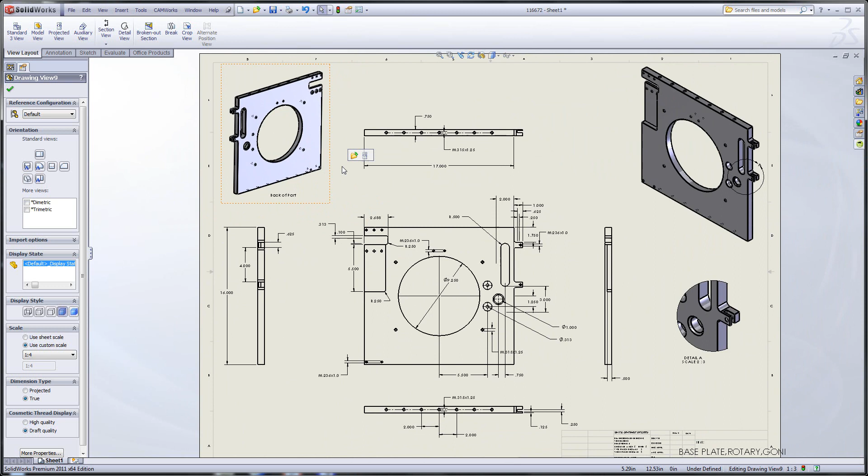We'll take a look at the plate, and Camworks works right inside of SolidWorks. You'll notice the only two differences are that we have two extra little tabs in the feature manager, and we also have a ribbon on the toolbar. Camworks works directly inside of SolidWorks, and it just launches as an add-in, similar to some of the other programs that you may use.

Camworks has been a long-time partner with SolidWorks since 1996, and when you purchase Camworks, you also get Solid Professor. So if I search on Solid Professor for Camworks, you'll see some of the courses for how to use the Camworks mill, the turning, and the EDM portions, and they have more to come. For the most part, Solid Professor is just a video library that's going to help you get started.

Let's go ahead and get back to the part. Camworks has two different tabs: one is the feature tree, and the other is the operation tree. On the feature tree, we can go ahead and set what our stock limits are.

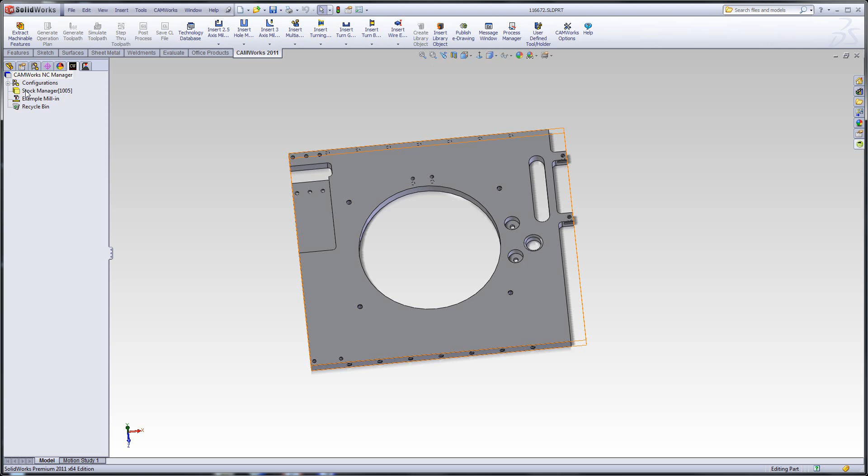If I edit the definition there, you'll notice it uses the envelope or the bounding box of the actual part to define its parameters. We can also use a sketch, or we can import an STL file if we're actually machining from casting.

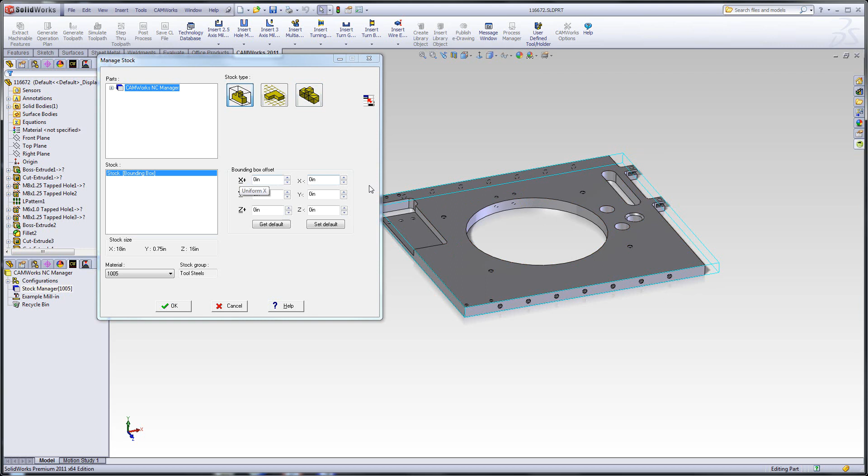Now this plate is already set the correct height, so I do want to go ahead and change some of the external components on the X, and I'm going to go ahead and hit the X so that it does it in both directions. So you can see I've got a little bit of space on both sides, and then I'm also going to do it in the Z. I've got to take a look at my X and Z, it's kind of a little bit flipped from here.

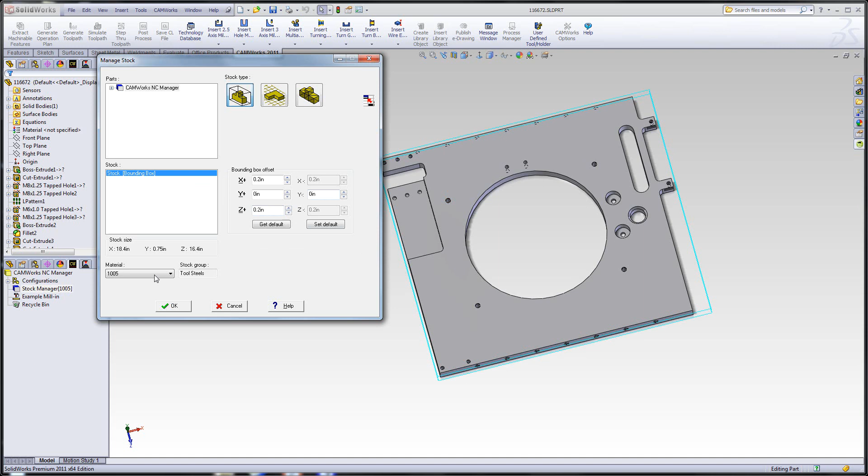So I'll go ahead and add a little bit of extra material. Last thing I need to do is go ahead and set my stock. So this is 6061 T6, and we'll hit OK.

The interface is fairly simple. The next thing I need to do is tell it what type of machine I'm going to use. So I edit the definition on the machine. If I go to the machine tab, you can kind of see I can pick mill turn, or wire EDM machines. In this case, I've already picked a mill inch, which is normally a 3-axis.

We have a tool crib that we can actually tell what different types of tooling we're going to use. And I also need to tell it what type of post we're going to use. In this case, it's just a 3-axis, and it's a Fanuc type post. So go ahead and say OK out of there.

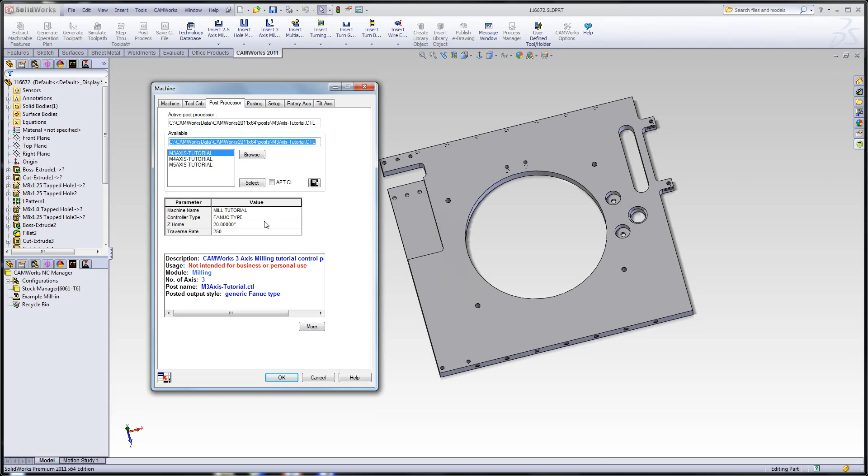And before I actually start creating some of my code, I'm going to take a look at some of the Camworks options.

On the Mill Features tab, I'm going to come down here. I'm going to tell it not to do any facing, and the reason is because I've got my plate stock, and I don't really care for it to do my part perimeter. I also don't have any tapered or filleted tops on here. I do have some chamfers, and we'll take care of those later. So I'll go ahead and say OK.

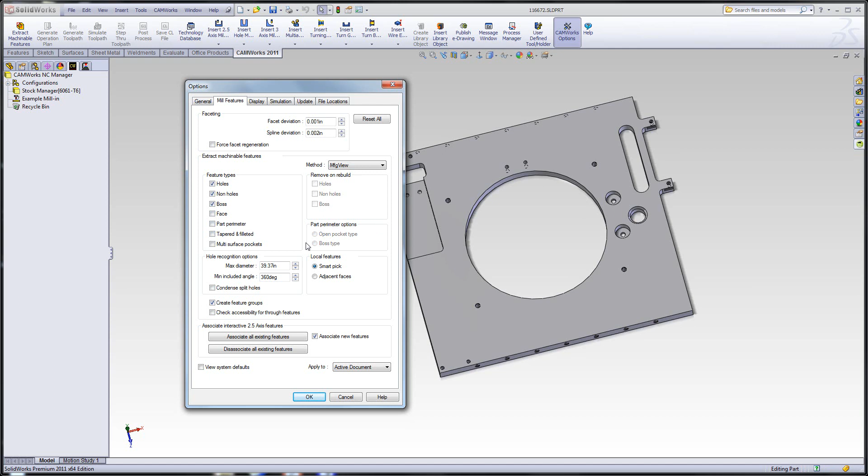And now I'll let Camworks go ahead and do its work. So I'll extract the machinable features. They usually call this Automatic Feature Recognition, or AFR for short.

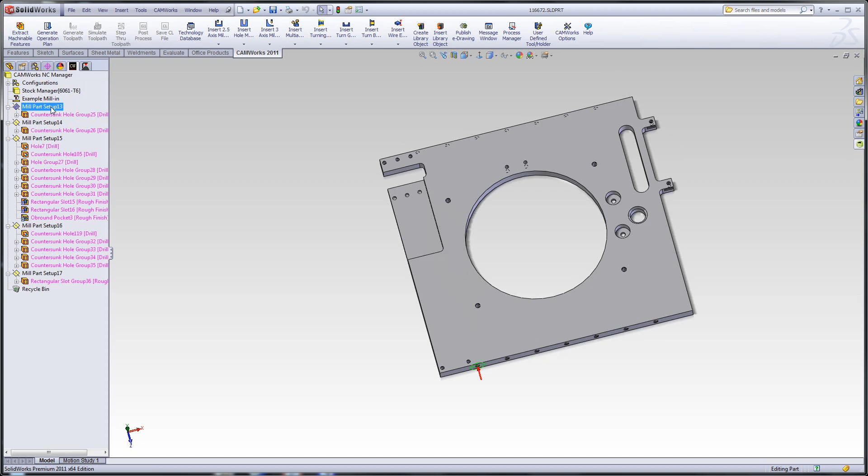And so Camworks has already created some mill part setups. These are where we're going to have to take the part out of the chuck and reorient it. So you notice that this is actually on the side view, where it actually has to machine these holes. I have a mill part setup on the other side. I have one on the very top, which is going to be my main part setup. And then I also have some stuff on the bottom that I may need to do.

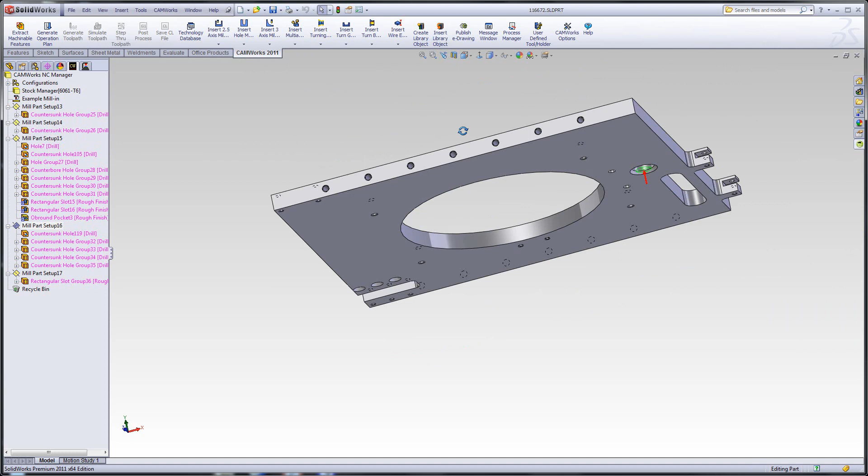Now what we do is these features are actually linking to the geometry that's out there. And then under some of these, we actually create the operations. Under the operations, it may actually do multiple passes, or a roughing and a finishing pass.

In this case with the countersunk, I'll go ahead and generate the operation plan. You'll notice it does a center drill, a drill, and a countersink. So all of these operations actually pertain to these individual features.

They're linked automatically. Next, all I got to do is tell it to create the toolpath. So all I got to do is select it, right click, and say generate toolpath. And there you can kind of see the toolpath as it's going in.

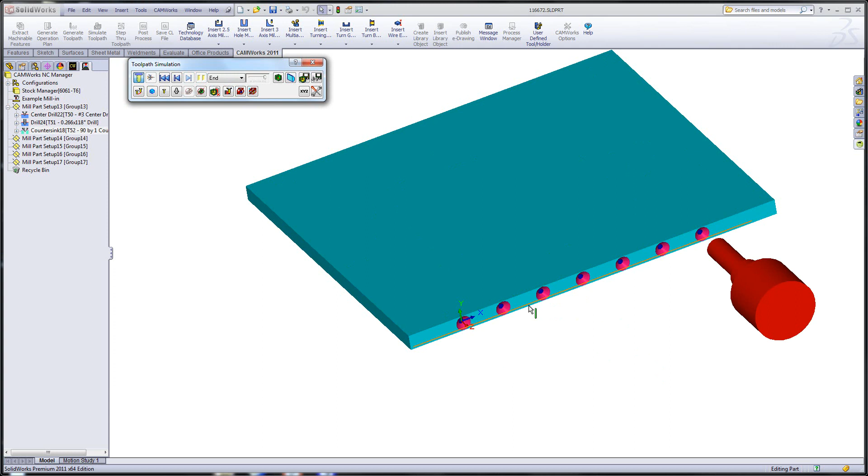If I want, I can also simulate the toolpath. You can kind of see we got a nice little simulator that goes in there and does that for us. The countersinks look a little bit big, but that's because I haven't faced around the outside of this part yet.

Also, when we're on the Operations tab, we need to tell it where our part zero is. Now, I haven't actually drilled this hole yet, so I don't exactly know where it's at. But after I'm done contouring the outside profile of this, I will know where this top left-hand corner is.

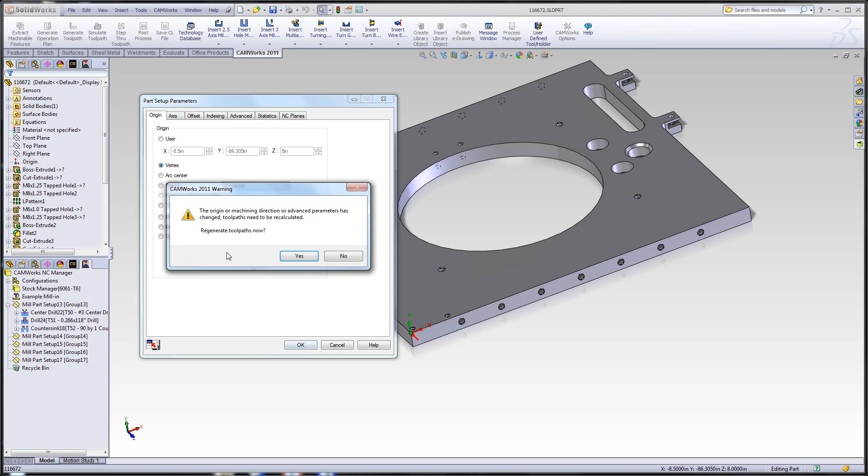So all I got to do is simply right-click, edit the definition of that part setup, and I'll just select on a vertex, and now I'll put my X and Y in that location. So now when I generate my code, everything's going to come out correct.

So that finishes off that face. Let's go ahead and do the countersinks on the other side.

So those are done. Now I've got the mill part set up on the top, which is actually going to do quite a bit of work. So let's go ahead and see what it does.

We'll just hold down Shift, select all those features, and right-click Generate the Operation Plan. It's quite a bit more stuff to go through.

Select on the mill part setup 15 here, and I'll tell it to generate the toolpath. As I hover my mouse down through here, you'll start seeing some of the toolpath.

And it's very simple. When I get down here, in case this rough mill, I may actually want to take care of that with the outer perimeter. So I'm going to go ahead and highlight both of those, and just simply right-click and hit Delete.

When you delete them, we actually put them inside of a recycling bin, so that way if you forgot or messed something up, you can always get them back. All you have to do is right-click and tell it to restore them.

Okay, in this case, I do want to go back, and I actually want to put in my own little part feature, and I'm going to put in a part perimeter. I'm going to go ahead and do a coarse strategy, and I'll just hit OK.

So here's my perimeter, the outside part of the pocket, and all I have to do is generate the operation plan, and it gives me a rough and then a contour. So I can do a rough and then a finishing pass.

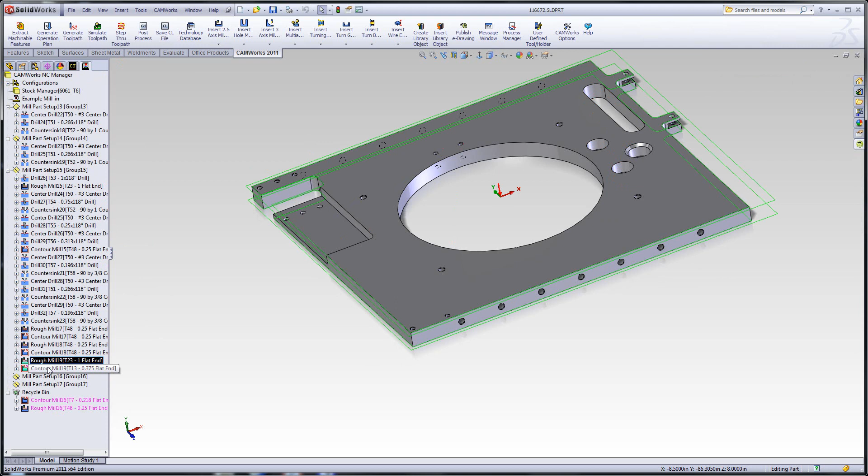And again, all I have to do is create the generate the toolpath, and I've got some good looking toolpath out there. Now if I wanted the rough mill and the contour mill to actually be the first operation in there, I could just simply drag and drop it to the top.

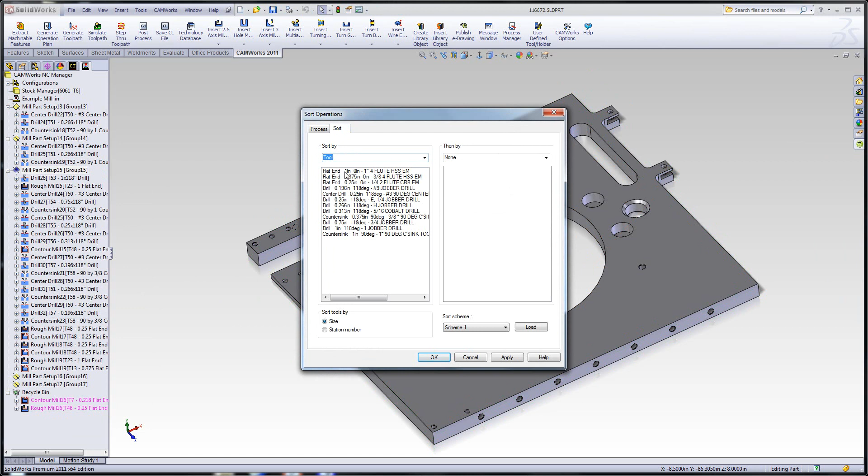But I do have some automated ways in which I can sort the toolpath either by operation or by tool. That way I could tell it to do all the operations with that tool at the same time.

In this case, I am just going to go ahead and drag up the rough mill and my contour mill, and we'll do those first.

Meanwhile, while I'm tidying some of this stuff up, you can kind of see I can also take, I want to do the mill part setup 15 first, so I'm going to take the entire mill part 14 and 13 and do them underneath the 15.

So we're doing all the outside components first, and then the mill part setup on the side, and then the mill part setup on the other side.

I've only got one more bit of features that I need to do, and that's on the back of the part. I've got some countersinks that I need to make sure that it does.

Now you'll notice on this mill part setup 16, it actually found quite a few different features. It found that countersink, the little countersink holes down here, but then it also found a lot of these other holes that go all the way through the part.

Well, those guys are already taken care of from the front of the part. So in this case, I really only need to generate the operations for these two features.

So here's my mill part 16. Again, select on the operations and just generate the toolpath. Next, we'll go ahead and flip this guy over, and let's simulate this and see how well CAMWorks did.

Just right-click and simulate the toolpath. I'm going to speed it up so it runs quite fast, but we do have a way to slow it down and then speed it up. You can kind of see it's also highlighting the different features as it's doing it.

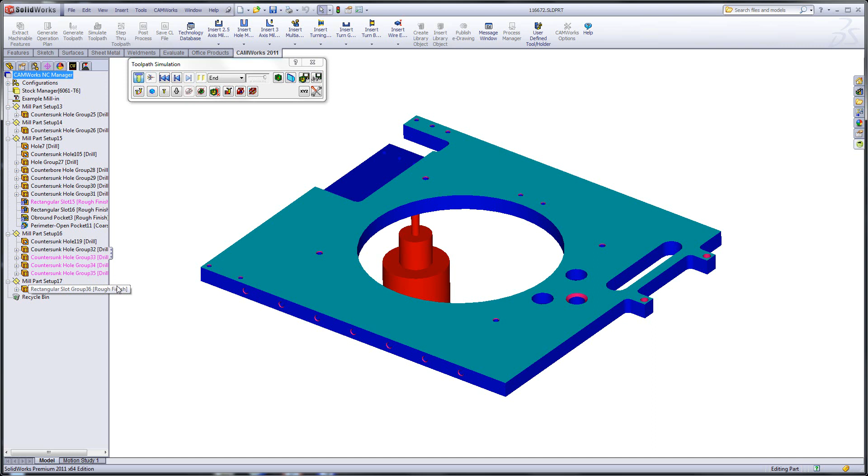It's not that CAMWorks didn't find it, which it did. The only thing is I don't want to do a whole mill part setup to do that. So let me go ahead and close out of there.

I'm just going to add in a part feature. I'm going to do a 2.5 axis feature, just going to be an open profile. And I'm just going to select on this little edge right there.

I need to tell it where to go from the top, so I'm going to say up to face, and I'll just select on the top face. So now it knows exactly what the depth of that thing is supposed to be. We'll go ahead and finish out of the feature.

You'll now see an open profile. All you have to do is generate the operation plan. So there's my contour mill. I'll go ahead and edit the definition on that guy.

I'm going to change the lead in to parallel and the lead out to parallel as well. And then I can give it a very big, large lead in amount, say for instance 2.5 inches, and we'll go ahead and lead it out about 0.15 inches.

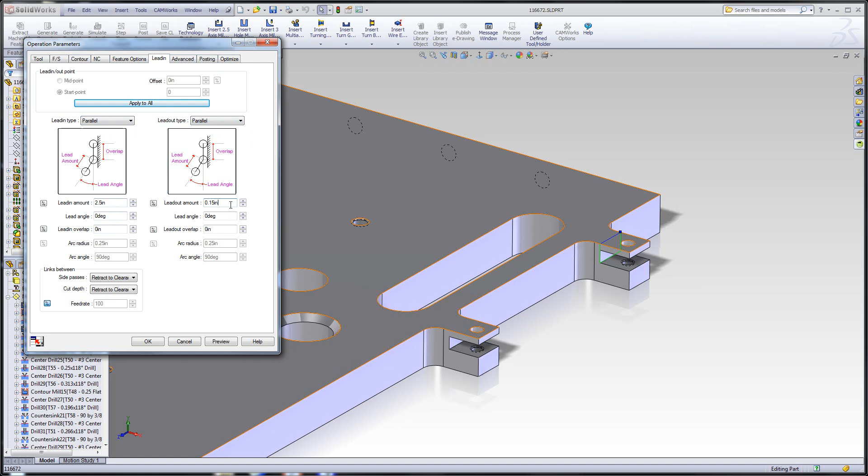I can hit the little preview, and now you can kind of see what my toolpath is actually going to look like. I can double click on the operation plan. That gets me back into the feature dialog.

I'm going to go to the tool and take a look at it. You'll see it's highlighting exactly where my cursor is, and that's just going to kind of pretty much whack off those little edges there. So we need to change our tool.

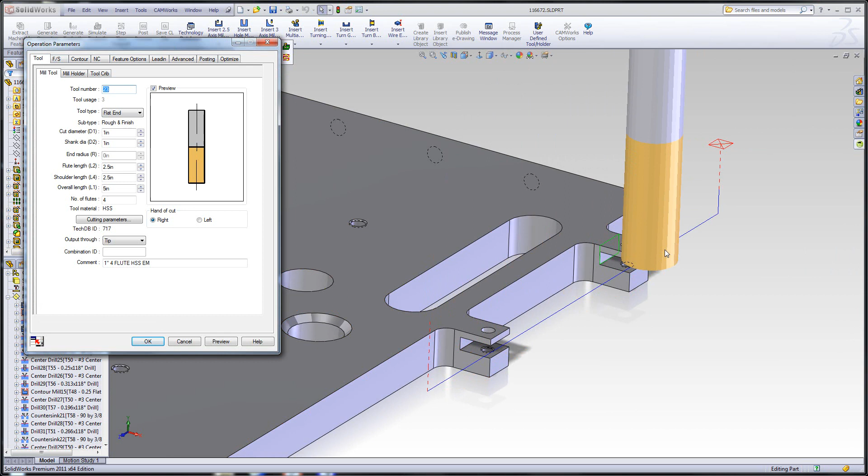Now my tool crib, I don't exactly have the right part for this, so I'm going to go ahead and add it from the library. In this case, I'm going to go get a keyway. I'm going to go pick a 1-inch slotter from here.

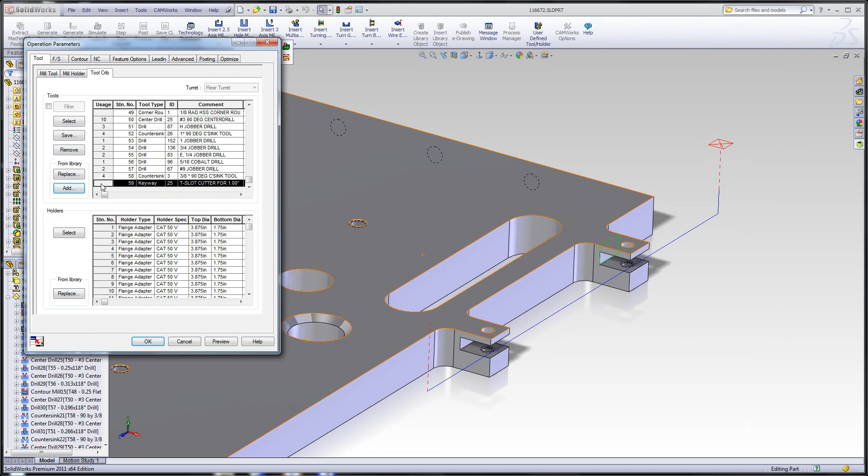Go ahead and scroll down to the bottom and actually select it, then replace the holder. So now you can kind of see I have a little keyway holder, but it doesn't look like the right size. So I need to change some of the parameters, and I can do that on the fly.

I'll go ahead and change the diameter to a 2-inch. Change the flute length to 1/4. So now you can kind of see what I'm starting to get.

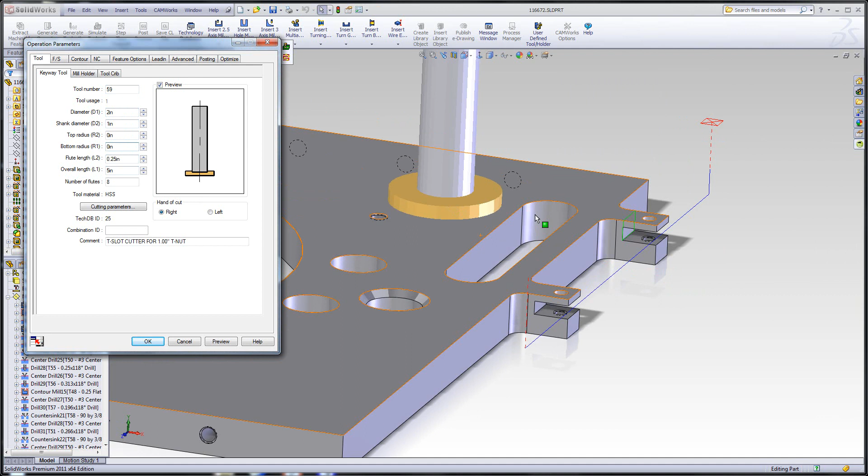I could probably do this if my shank diameter was a little bit smaller as well. I can rotate around, and I want to make sure that I can get that through there. That looks pretty good. So I hit the little preview on that.

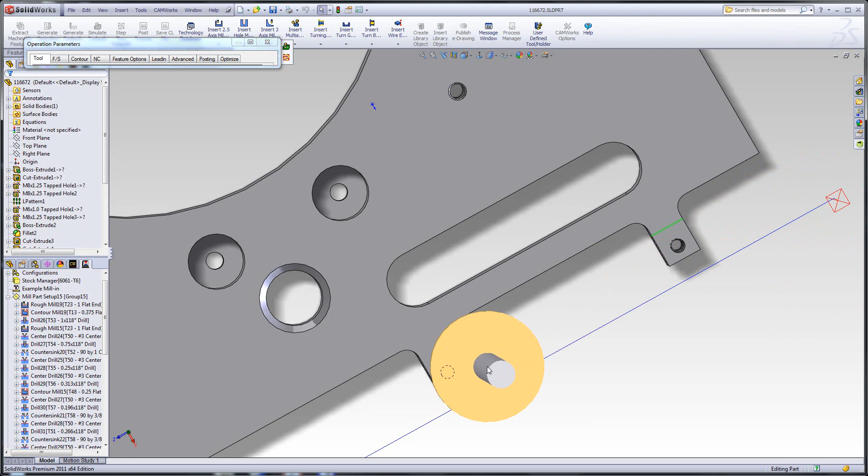You'll notice that the toolpath offsets from the edge of that. So we're going to come down here, go all the way across here, finish up right here, and go ahead and pull out. Go ahead and hit OK, and my toolpath is complete.

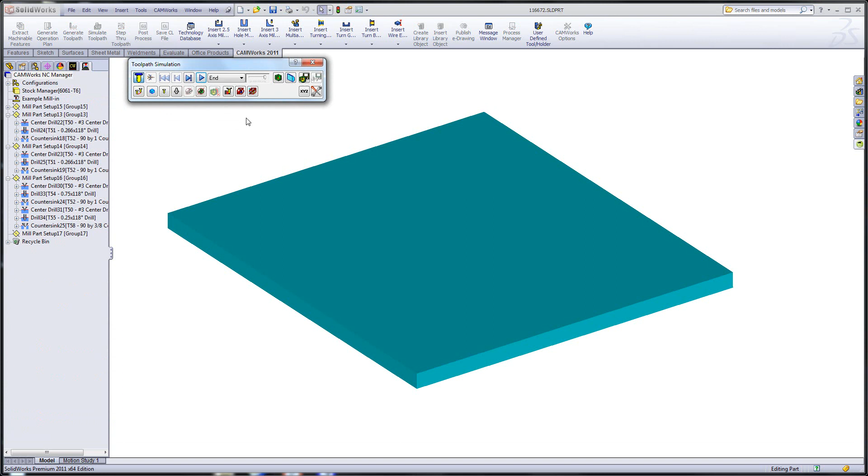Looks like we got the part pretty much done. So now all I want to do is verify it and make sure that it's going to run correctly. Again, I'm going to right click on the very top and we'll simulate the toolpath here, running it all the way through in a very fast mode.

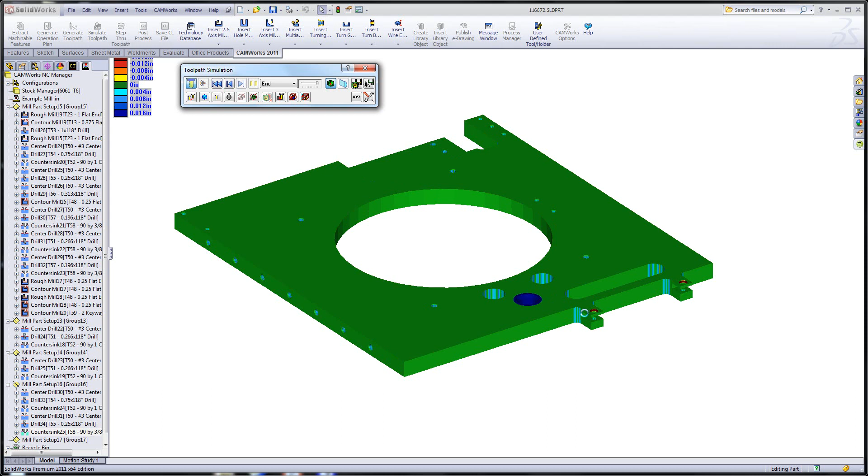Notice the little cuts down here, and we can compare the actual cut part to the actual part itself. I get a graph that shows anything close to a certain tolerance, in this case 0 inches, shown in green. Most of my stuff is green. There's a bit of blue where I may need to change my tool, and a bit of red which may be an overcut, so I might need a smaller diameter tool or go in with a small end mill to route that out. But it may be okay, we can always check it later.

I wanted to fix one more bit of toolpath on this rough mill. I saw it was taking quite a bit of time and the parallel passes were going in the wrong direction, so all I have to do is edit the definition. Notice it's using a 1/4 inch end mill, so I'm going to go to the tool crib and find a 1/2 inch flat.

Select it, we'll replace the holder. Next I'll go to the roughing tab and change the cut angle to 90 degrees, and take a look at the preview before getting out of the dialog box. That looks quite a bit better, but I can actually do it with just 2 passes. So on the depth parameter, change this to 1/4 inch and the max cut to 1/4 inch. Hit preview, and now I'm only stepping down two times.

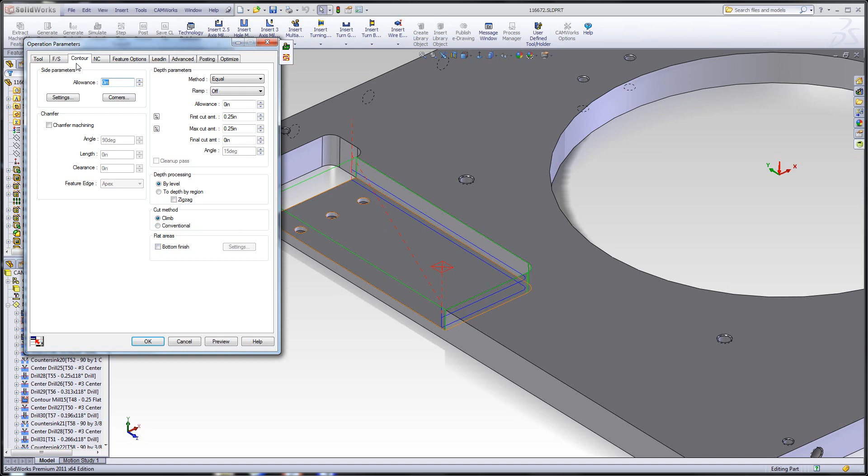Now that that's done, I want to check the finishing pass as well, so we'll edit the definition on this one. Notice it's just finishing on the side face. I also want it to finish on the bottom, since that may need a good surface finish. So on the contour tab, I'll click on bottom finish and hit OK, and now I get a nice bottom finish. I'm also using the smaller tool so it comes up in the corner correctly and should give a nice finish.

One more feature I wanted to take care of is the rough mill here. I'm going to edit this definition and change my tool to something a little larger. I'll select this and change it to a 2 inch tool.

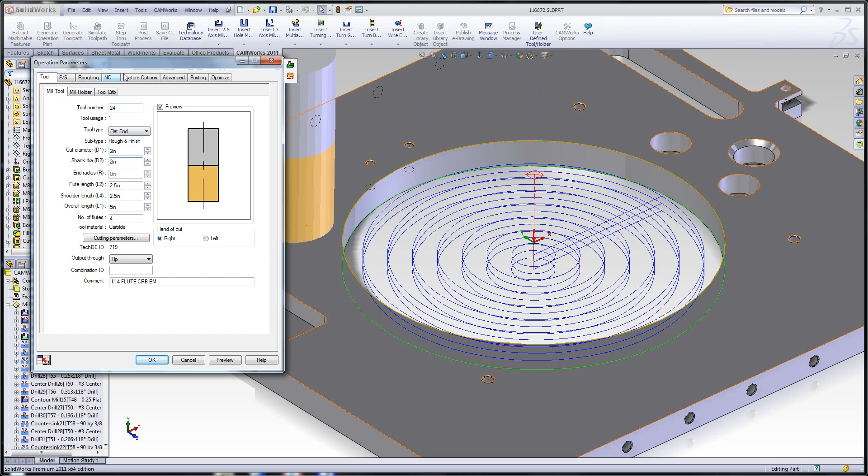So I should be able to hog this out pretty quick. But I want to change the way I come into the actual part, so on the Feature Options tab I'll change my plunge to a spiral entry. I'll take a look at the preview - doesn't look any different, so let's change some of our settings.

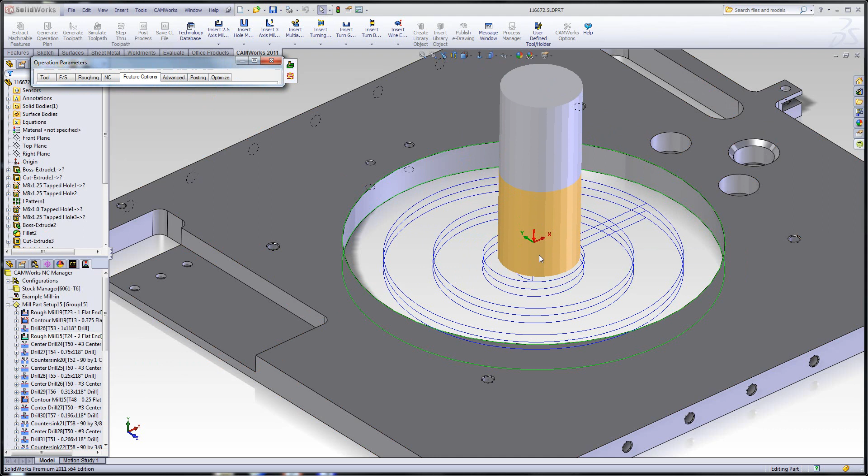We'll do a 1/2 inch radius with a 1/2 inch pitch, and now we've got a nice little spiral coming in. That's exactly what I want, so I hit OK. Now the toolpath looks satisfactory to me.

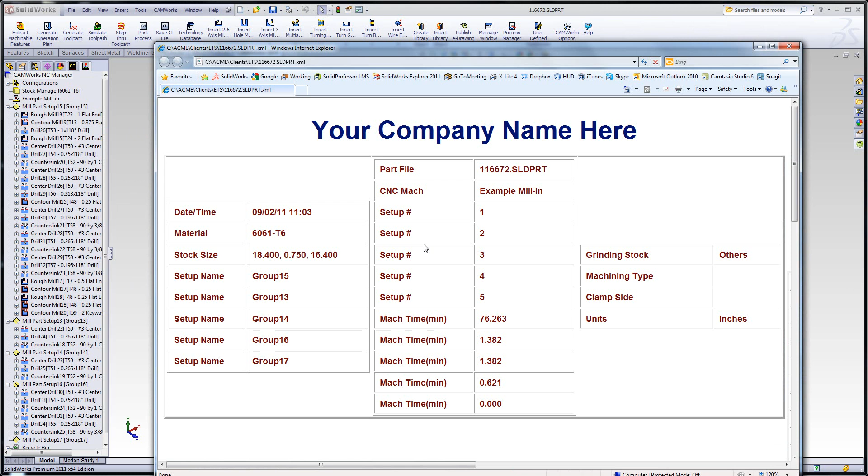Next, before I post the code, I'll go into the setup sheets and generate a setup sheet. We have a few different templates depending on what you want to see, so in this case I'll use template 4. Wait for it to generate, then it opens in Internet Explorer, and you'll notice a nice looking tool list with all the different tools, feeds, speeds, RPM setup, and everything I need to complete my job.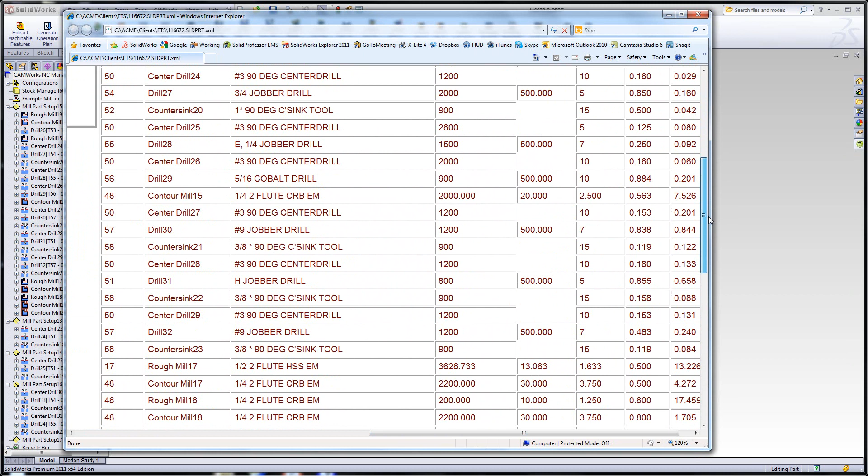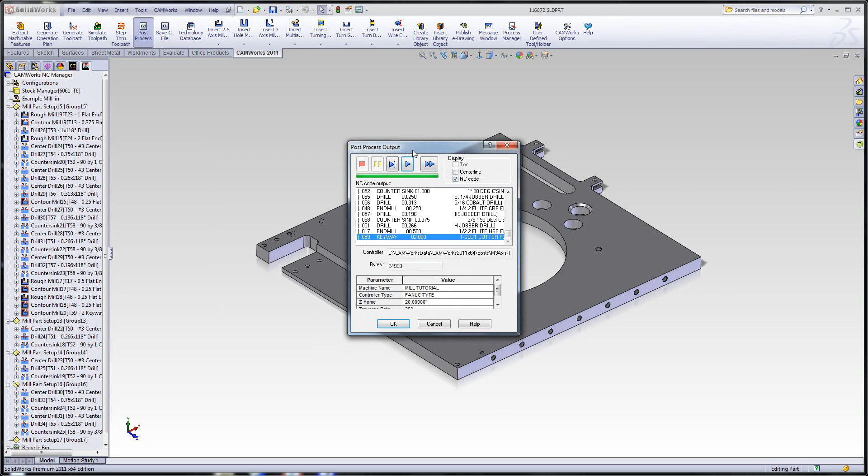Now I'm ready to post my process. I'll save this as a text file, but I can also change it to just an NC. I'll hit save, then hit play, and that'll create the NC code. You'll notice CAMWorks is very fast at this. I'll say OK, and let's take a look inside Windows Explorer and see what we've got. I'll close out of these files just so you can see.

You can see them without all the temp files. So there I've got my SolidWorks part, I've got my drawing, and then I've got this NC file. I've got the XML file, which is my setup sheet, and it also has a style sheet that goes along with it. That's kind of extra stuff, and I don't care to actually put that in there. But something I do want to do is on this drawing...

This drawing actually contains that part, but Enterprise doesn't know about that until I actually check it in. Before I check it in, I also want to link this NC file, the text file, to the actual part to make sure that whenever I check something in or out, I can tell that it's linked. So all I have to do is right click on it, copy, select on the actual part, and do paste as reference.

You'll notice that underneath the part, now there's an existing NC file, and Enterprise is going to know that that is a linked child-parent relationship. So I'll say OK, and now if I go ahead and check this guy in, and when I go to check the drawing in, you'll notice it's referencing the part, and that part is actually referencing the NC file.

Now there are some references to the SolidWorks part file that are coming from an assembly file, but I wasn't given those, so I'm not going to check those guys in. So I'll go ahead and check the files in.

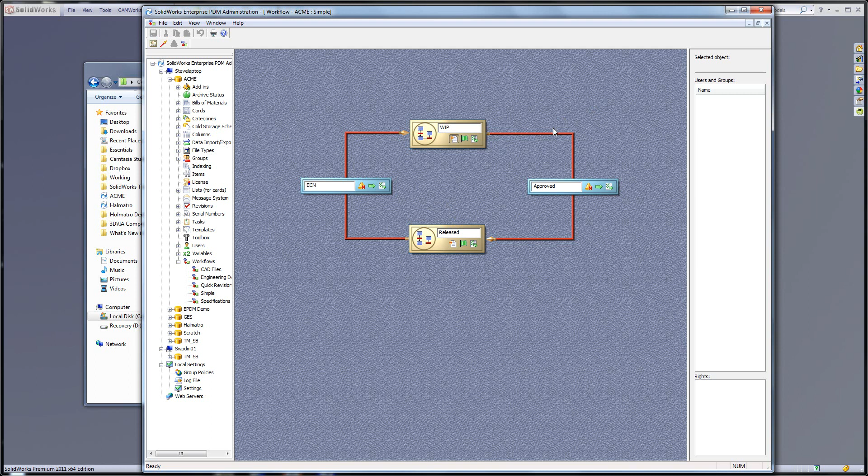So I can right click on him, change him to approved, create his little PDF if you like. And now you can see he's in a release state.

So we could have different file types actually go through different workflows depending on what different departments they're in. And the thing to check and make sure we have everything set up right, we might need to look at the data card.

And we'll have to check and make sure that revision A is set for both the drawing, the part, and the NC file. If it's not set right for the NC file, then we know that somebody's got to do some work.

So hopefully you've seen some great workflows on taking a SolidWorks part file, putting it into CAMWorks and actually generating the code. Everything is stored right within the SolidWorks part file, so there's no external files other than the NC code or any type of reports that you may want to export.

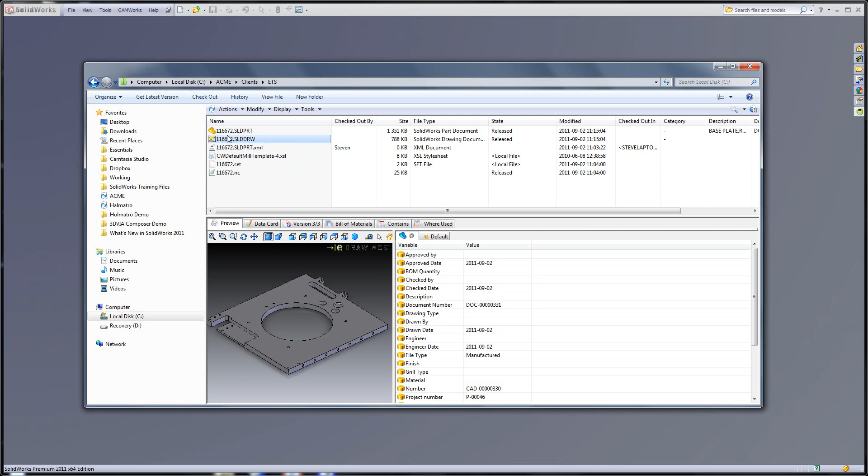Then we've checked it in using Enterprise PDM, and we're able to send the drawing and the part file through two different separate workflows, separate from the NC file going through a manufacturing process or workflow.